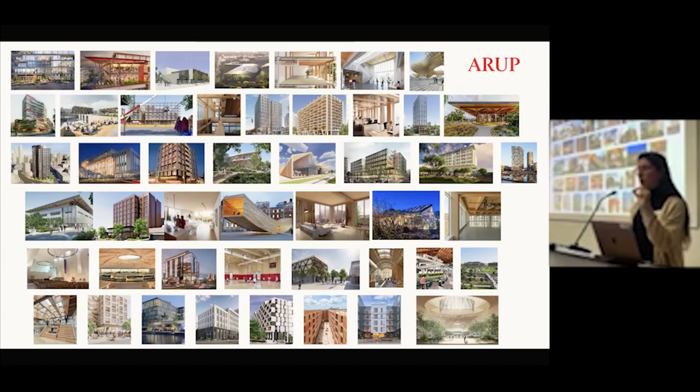One of the interesting learnings when you first get into a mass timber project like 475 West 18th Street was, for me, really understanding this interplay between a lot of different disciplines you don't normally think about in traditional construction—fire, acoustic, structural, sustainability—there's this really strong connection. It's important to understand that so you can push the boundaries and build taller, like we'll be talking about today.

We'll hear a lot more about this, but a lot of the work that came out of these early projects included fire testing, acoustic and vibration testing that needed to be done for us to really set an understanding of how mass timber would work as we built larger with newer materials.

Here at Arup, we also took some of this information and translated it into our sound lab, which some of you may have visited before, or onto the motion platform, to experience what it sounds and feels like to be in some of these different spaces when building with a new material. If anyone's interested, feel free to chat with me about it later.

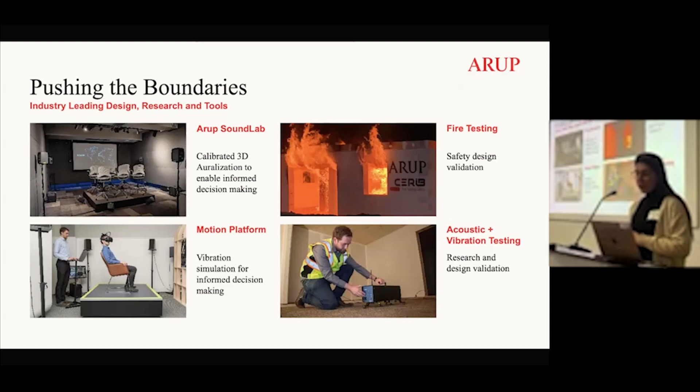These projects really allowed the next level. The permitting work for both Framework and 475 West 18th really informed the performance-based design approach for Ascent, which was ultimately built. A lot of the thinking around building taller led to more hybrid construction, which we'll hear more about, and some innovation in high seismic zones, which we'll also hear more about.

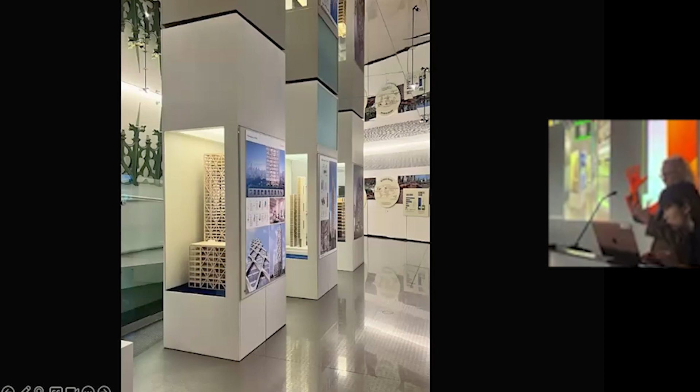The view back, looking at some of the more theoretical towers, back to a wall that sets up the context for the exhibitions, but also the important overarching narrative that's changed in these past years, looking at the decade from the winners of the competition in 2014, and the place where the architectural and engineering community is today, principally concerned with the issue of climate crisis and embodied energy.

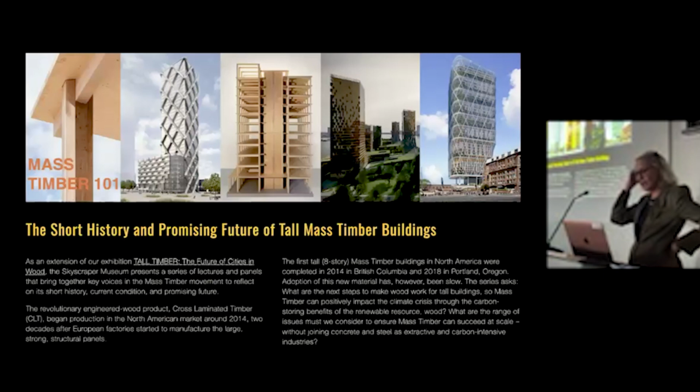One of the virtues of mass timber is its carbon cost is extremely low, unlike steel and concrete. It's a way the building community can address their complicity in the overall climate crisis and carbon emissions. Everybody here is familiar with this argument, but I want to use these images to underscore the idea of embodied carbon as the principal concern of the mass timber solution we're going to explore in the whole series.

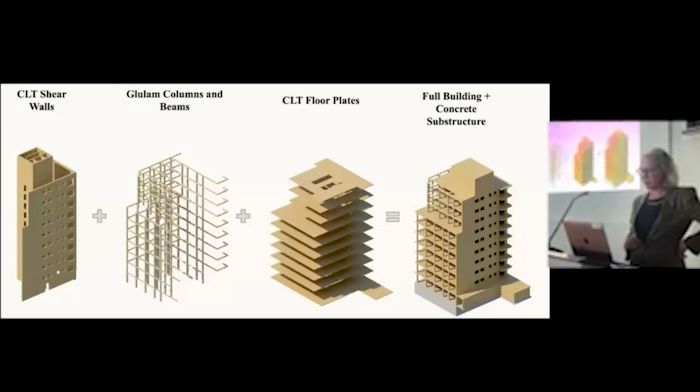I won't tell you about this competition because our speakers will, but it marks a very important aspect of the taking root of tall timber, mass timber, in the United States, and that is the role of government and incentivizing. How does mass timber consolidate as an industry, which it hasn't done? How does it grow? How do we bring in developers as well as engineers and architects concerned with these issues? Those are the larger ideas we want to explore over the course of the series.

Thomas Robinson is the founder and principal of Lever Architecture. Prior to establishing the firm, he led cultural and institutional projects for Allied Works and for Herzog and de Meuron. He received his Master's of Architecture from the GSD at Harvard and his BA from UC Berkeley. Many of you know our New York principal from SHOP, one of the founding principals of the Lower Manhattan-based internationally active practice. Chris's concentration is on revolutionary models of building that embrace next-generation environmental and material systems, such as bio-based materials, as well as process-driven innovation utilizing offsite manufacturing to achieve more efficient and environmentally responsive building delivery.

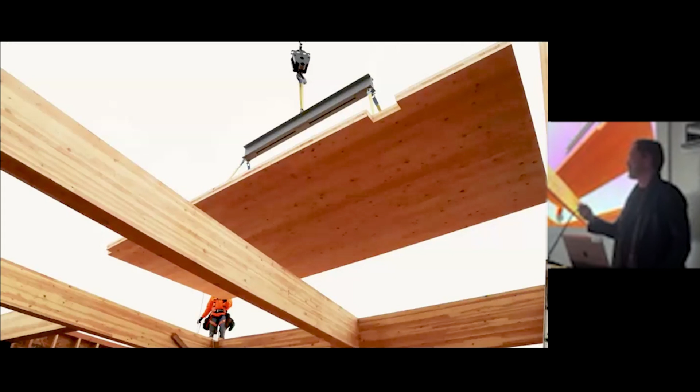Oregon happens to be over 60% forest, and it's also the best place in the world to grow Doug fir in its native habitat. So we have, in a way, this natural advantage of this amazing climate and material for trees. And this has led to this evolution and innovation in timber that's been going on for quite a while. This is a cross-laminated timber panel that many of you have heard of.

But I think this goes deeper. Our work as a firm is really not just about cross-laminated timber, but about thinking about where materials come from and how they connect to experiences. So this is a winery that we just recently finished using regionally sourced timber, and investigating working with new materials like mass plywood.

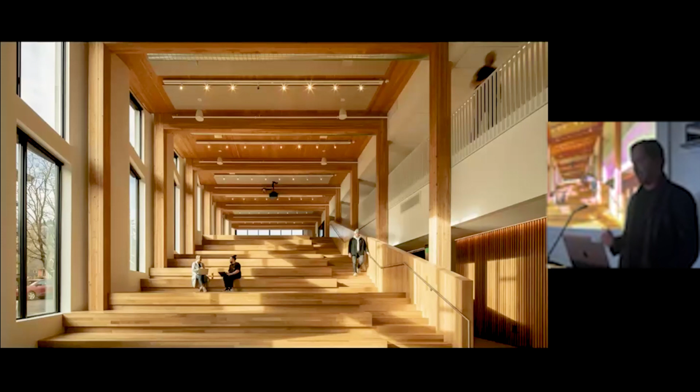This is a pavilion that was done at the time of the exhibit. And this is a project that was finished last month, working with Timber Lab on some of the materials and technologies we developed in 2016. This is an office for a digital ad agency. When we talked to Timber Lab, they said this was the most efficient timber building they've ever built. We built this in 11 months. So that's the kind of thing that dovetails back into our office.

This is Albina Yard, completed in 2016. It was really the first building in the United States, I guess in the world, using domestically sourced CLT fir in an office building. At that time, there was only one press that was making this, in Southern Oregon.

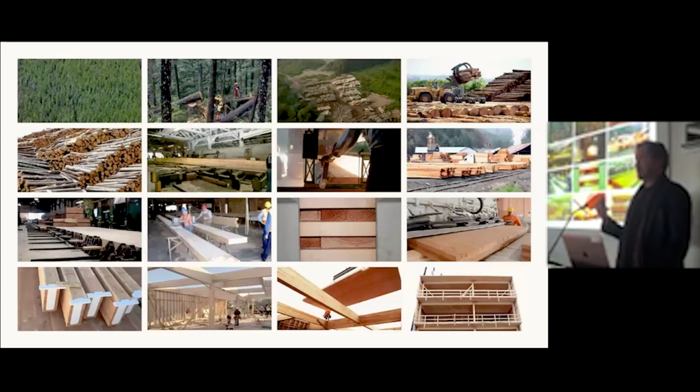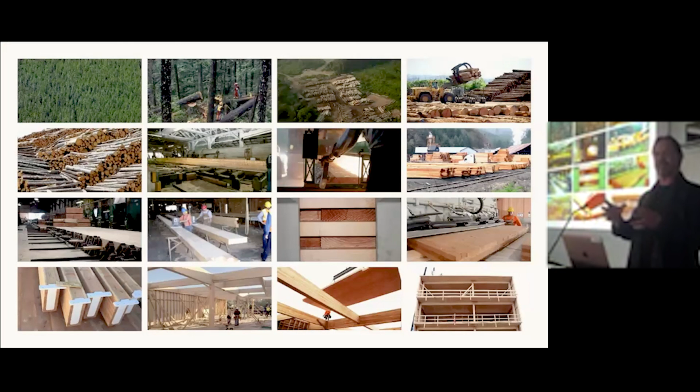And we took a more culinary approach to the design, because we realized we had to really start with the material, like a chef might start with an ingredient and then build a meal. We focused on that, and we came up with this term that was really a play on farm to table: forest to frame. That was really for this project.

You might have heard this term batted around about design and architecture. It was really about the idea that in order to do these types of innovative pieces, sometimes you have to start with the material itself, understanding what you can do with it, how you can actually get it permitted. These were all things happening as we were thinking about framework. This is my favorite image of the project: the panel you see hanging in the air was actually grown in the forest in the distance, fabricated on that press, and then shipped to Portland and put together. You can see a video of this work if you go to the Skyscraper Museum.

So framework, 2015, September 18th, that's actually Chris, you can see right in front of us. The developer, there's Jeff, and there's Anyeley Hallová, who's standing next to Jeff, who was the lead developer I still work with today. Of course, they have to have the award ceremony in New York because it's New York and it's on the High Line. Not a tree in sight.

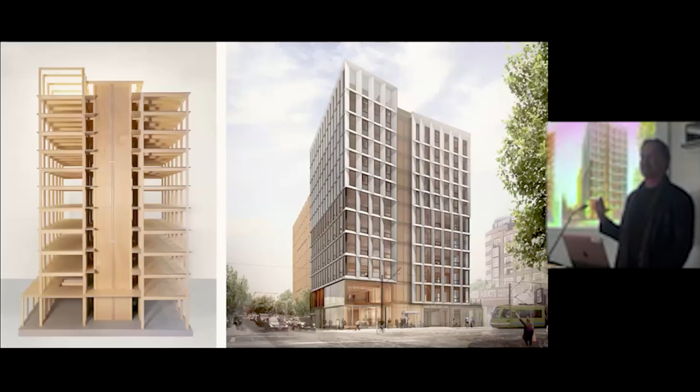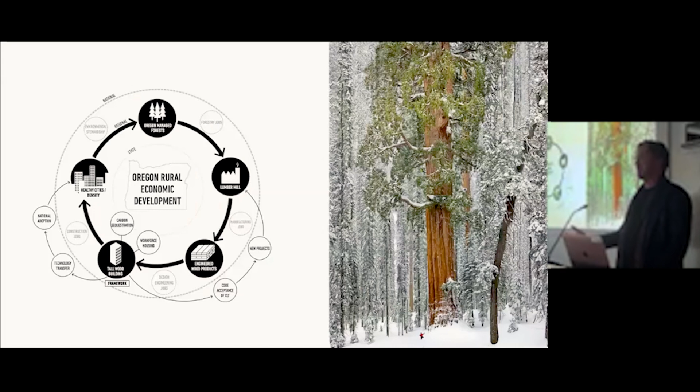But for us, it was just an incredible opportunity to participate in this conversation about the future of building. I think what's exciting for us is to be part of that conversation, and framework for us was that opportunity. What was framework? It was really, and Chris will talk about this too, we were trying to demonstrate with funding from the USDA, $1.5 million of funding, that you could build a high-rise timber building. We're really fortunate in that we basically went through 100% CDs and testing on this project. So pretty much we did everything but build the building. That testing has become publicly available, and it's become used by other people.

And that's been really, I think, an important part of this ongoing conversation in architecture.

Another really important thing for us, related to sourcing and issues around equity, is this idea of a different way of thinking about building. We created this diagram late one night before the competition was due, and what's interesting is how much of what you see in this diagram has actually come to pass in the last 9 years. We don't take credit for that, but it's exciting to see that evolution in such a short period of time.

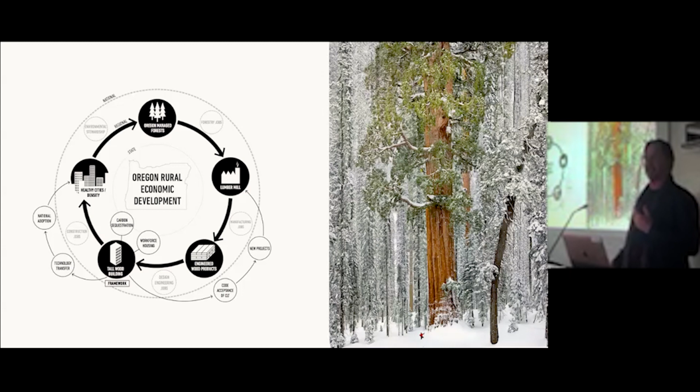From an architecture point of view, there's this idea of what these buildings should be as buildings. This super tall Doug Fir, you can see the person down here to give you a sense of scale. We were trying to do this tall wood building, inspired by these living tall wood structures that are 400, 600 years old, 260 feet tall.

The idea of these resilient timber structures led to this concept of asking what we could do on the West Coast that's different from wood, different from steel, different from concrete. So we developed what we call a post-tension CLT rocking wall structure.

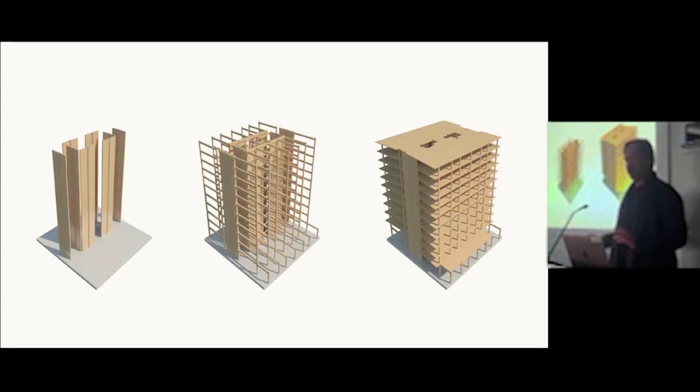These are the rocking walls here, there's 8 of them, and they'll come back later so you'll understand what I'm talking about. Basically, think of it like a building where the force hits it and it's in tension, so it can actually spring back to center. That's the idea of a building you could reoccupy immediately after an earthquake.

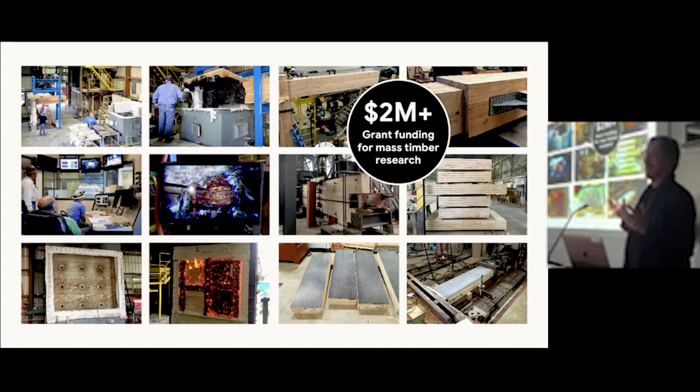We were really fortunate. We did over 40 full-scale tests. I signed all the contracts with all the different labs throughout the country — we were in Pennsylvania, San Antonio, Portland, Oregon State. This is just a sampling of some of them.

To make it even more difficult for us, we had a building that was mixed-use, with a bank and retail on the ground floor, offices, and then 60 units of affordable housing on the upper floor. That was obviously a challenge — figuring out how these 8 rocking walls translated through the building and then became these housing elements.

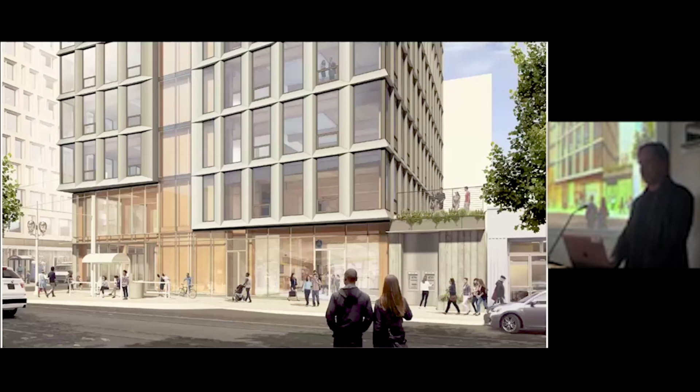Just to understand a little how that worked — going back to that image of the tree, we wanted that to be something you could see and sense. So you have these rocking walls as part of the architecture and part of the experience you'd have every day in the building. We also liked the idea that the facade had a relationship to the structure of a budding leaf on trees, which was exciting for us.

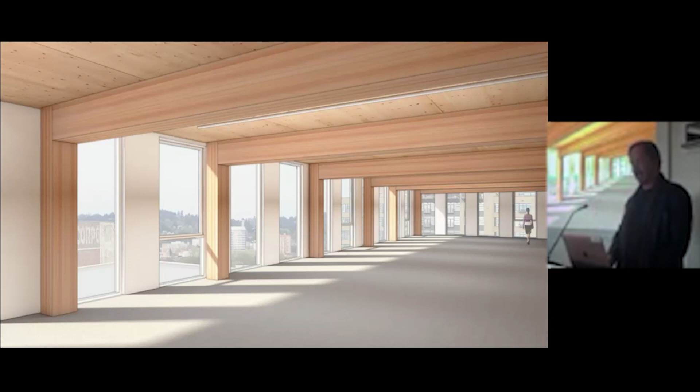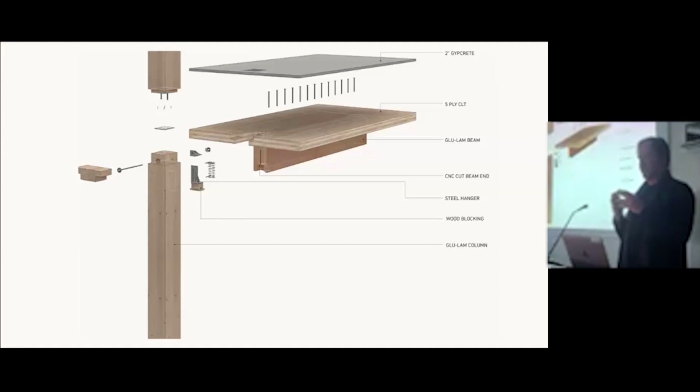Back to the more prosaic part — we had to do a really unusual test. Folks here may be familiar with high rises: in a high rise, you have to have a detail where the structure works for 3 hours without the sprinklers turning on and without the fire department showing up. So this is what we tried to do here — you can see in the structure just one detail we had to test.

We call this the framework detail. This component detail had to be tested in a furnace, fully loaded. We basically put it in this furnace and light it on fire — you can see it's on fire here — and load it to its rated capacity. Then, maybe you can see, this is it coming out of the furnace, and then they do what's called a hose test, spraying it. This is all ASTM testing — the same way they test concrete structures for high rises. It hadn't been done in a while, but I wanted to show you.

The other thing we did was test the connections for this rocking wall. We had to take timber, bind it together, do this post-tensioning, and then basically put the equivalent of 55 dump trucks on top of that — about 500 kips — to make sure that connection held. At the same time, we were also doing all the internal detailing.

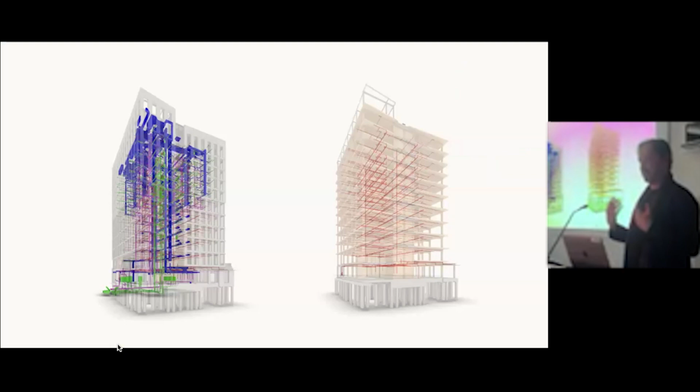This is the Navisworks model of all the structure in that building, showing all the different systems overlaid. So that was a lot of work, but we learned an incredible amount.

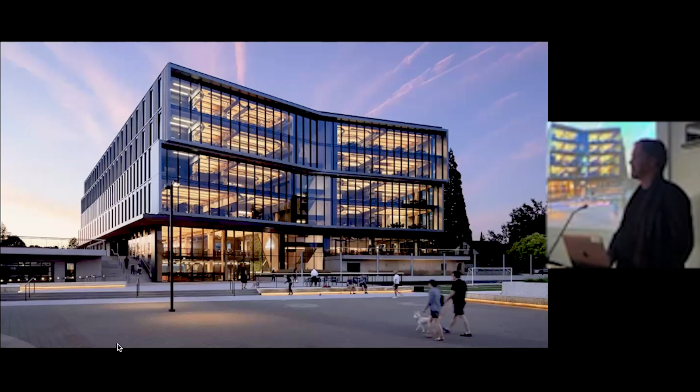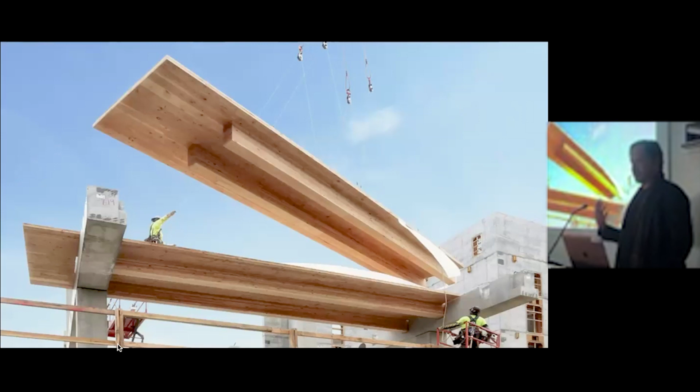Adidas said, well, as long as it's on budget, you can do it in timber, and we want it done 3 months faster than a typical project. So this whole project, 450,000 square feet, including a 600 space parking garage, was completed in 24 months during COVID. The way we were able to do that was to develop a new type of structural system where we basically took the idea of a precast parking garage and developed a custom girder and what we call a double T CLT, to create a system that's super robust and takes the grid of the parking garage through.

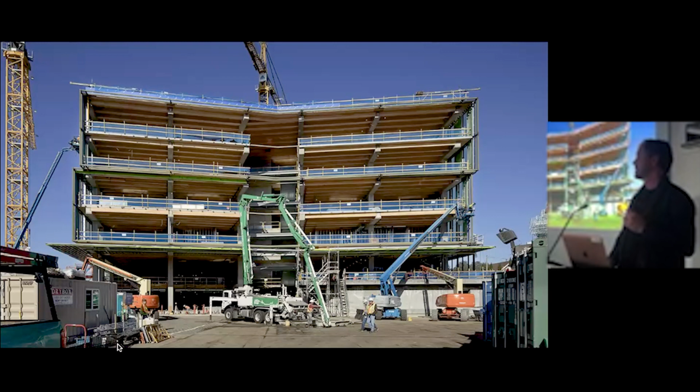We were able to build 180,000 square feet in 2 months with this system, the whole structure. Super fast, but also really authentic to Adidas brand. Everything's exposed, a very flexible system. That project has gotten a lot of different recognition, and I think you're seeing people doing whole high-rise buildings out of it. I think this is actually a really good model for a high-rise structure.

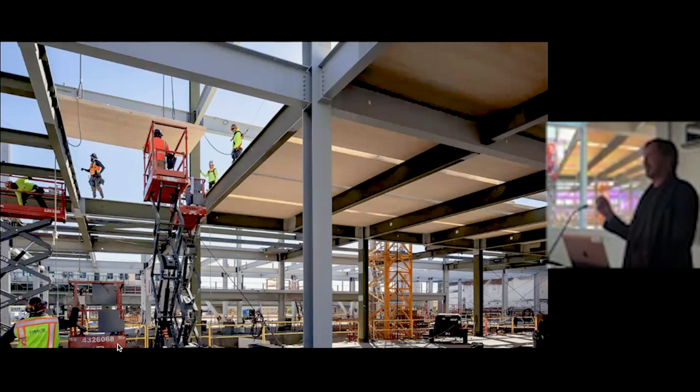Another project that we're just finishing up is a hybrid of timber and steel. It's actually a renovation, in Spring Street in Chinatown. These are some scouting photos from the last couple of weeks. It's basically a hybrid of a steel gravity structure brace frame and then a CLT deck with these cantilever decks. We worked on this thinking about how it's hard to build new things in cities, so working on what's the one thing we can do a little bit differently in LA. That was what we focused on here.

This actually has, these types of braces used in high-rise - they're Cast Connex braces, so we worked with them. I think it's not enough to just be a timber building; it has to be related to its place more than just the timber coming from there. So we wanted to do a building where we created this vertical canyon.

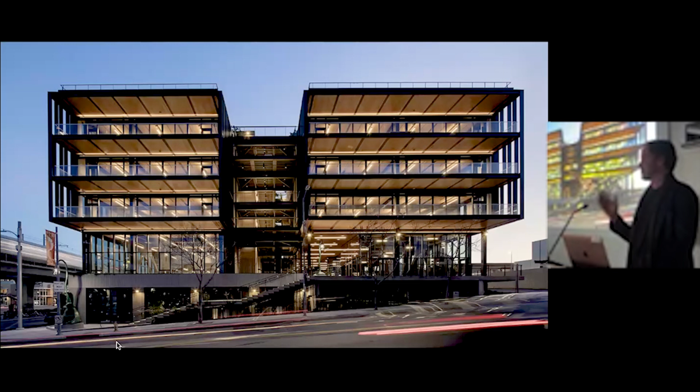We worked with James Corner Field Operations, who did the High Line, to develop this amazing landscape canyon. Everything is accessible from the outside, so the whole circulation system goes up through the building. This is finished - if you're on the metro in Chinatown, it's right there, and it's for lease. So if you know somebody, they're excited about that particular project.

So sourcing. Sourcing has always been embedded in how we think about design. It was in framework, and we were absolutely committed to using regionally sourced CLT for that project. We've kind of tried to expand that in our work.

I want to talk about one story, beyond CLT - this was actually FSC certified CLT from a forest that they own, but I don't necessarily recommend that. I think one of the things we worked on was using juniper. Juniper is a very hardy tree native to Oregon, and because of fire suppression, it's gone wild throughout Eastern Oregon. What it does is suck up groundwater out of the landscape, meaning wildlife can't survive.

We worked with a nonprofit to look at a test case of using juniper for the facade of this building. The idea is to create a market so that we can actually afford to cut down the trees to restore that landscape, and I think that's something we were able to do. This building restored about 700,000 gallons of water back into that landscape each year.

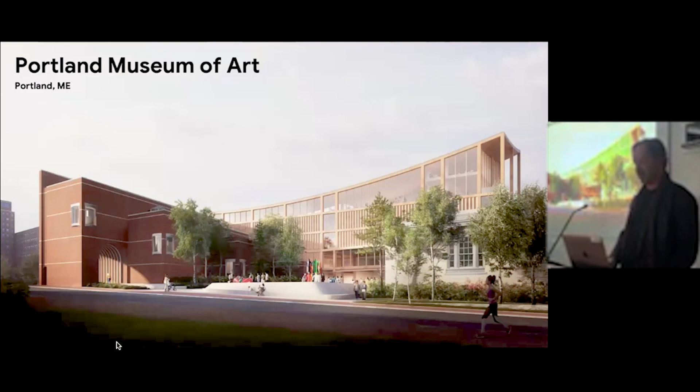This project for us really combines so many of the things I've been talking about, this idea of a catalyst project that can unlock using Northeast fiber. And this is happening right now. We're tracking the forest. A couple other projects, a year ago, people were like, that's impossible. It's happening, and I'm seeing it happening, where people are interested in doing this work.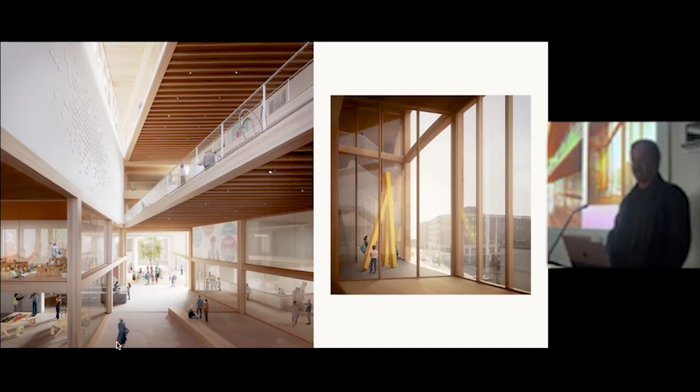So we're sourcing Maine fiber, which is spruce, and I think that kind of opportunity is real. The other thing that's been really exciting about this project personally is its interest in connecting to Native American culture, in terms of the shape of the building, in terms of welcoming communities into the museum that haven't necessarily always felt welcome. I think the material of timber is something that's very welcoming to people who maybe aren't as comfortable in other types of spaces, and that's also been a key piece of that project.

I'd love to talk more about it, but I want to actually get to the discussion and then more research.

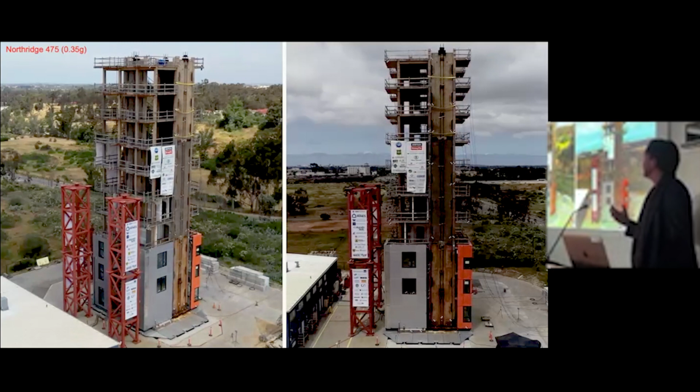Since the time of Framework, we've been working seven-plus years with all these academic institutions to build a 10-story version of Framework. There's no sound, but it makes a big clanking noise if there was sound. This is basically a full-scale test of Framework at 10 stories tall on the largest outdoor shake table in the world at UC San Diego.

So it's right next to Miramar - this is Top Gun in the background, if you know. What it is, this is the Northridge quake, a huge earthquake hitting this building, and basically we walked right up to it right afterwards, completely safe.

This was done with folks from Colorado School of Mines, Washington, and we were the architects working with them over that time period to see what we could fit on that shake table. I think this is the next generation of what's possible - this idea of not only a carbon positive way of building, but a more resilient way of building, at least on the West Coast.

We've done a whole other performance-based design project for a technology client. They wanted to push the envelope of what's possible to give themselves incredible flexibility, because one of the issues with timber is that it spans - timber doesn't span as efficiently as steel.

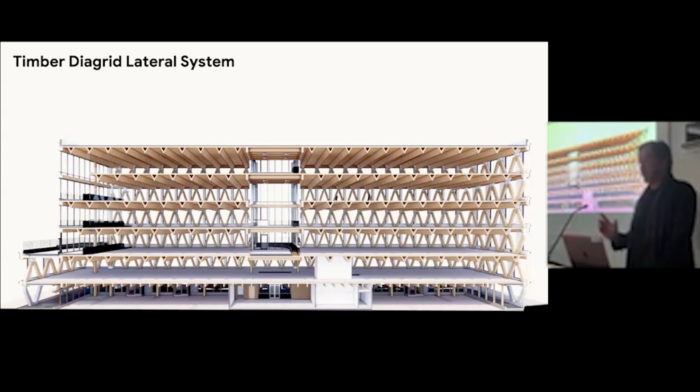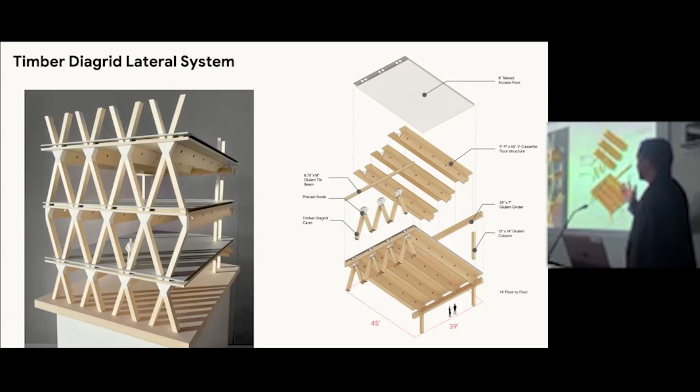So what we did on this project is we took some of the ideas from Adidas and created this 45-foot long cassette that's also a duct, then tied that to a seismic timber diagrid system with precast nodes, and basically designed, engineered, and tested the whole system.

Basically, this is the typical element of it, and this is sort of what it ends up looking like. You can actually have these pieces be supplies or returns. It actually works acoustically, which was shocking to us, and it works from a daylighting point of view because it refracts the daylight in a really pleasant way. We were really excited to see that kind of opportunity materialize.

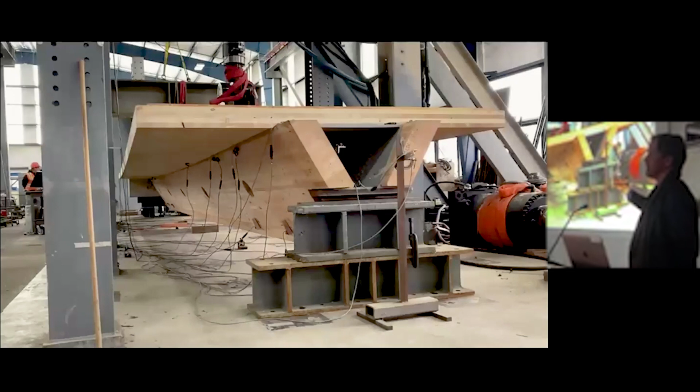We built six of these full scale in Portland, brought them to the same kind of press we'd used on Framework, and then basically destroyed them, because that's what we had to do for the code. So that kind of work has been ongoing.

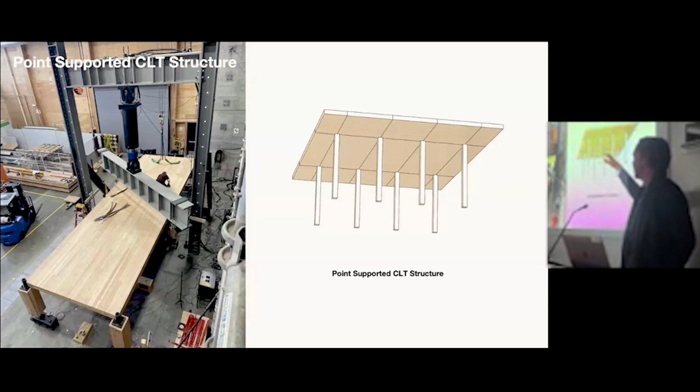This is another test we were recently involved with. There's a group of folks in Portland on the REACTS consortium where we get together and decide what tests need to happen to advance the technology in mass timber. This is the point-supported CLT test that happened about six months ago in Oregon. Basically, it's allowing and showing that you can do point-supported CLT, and that is related to a project, because I need to end with a high-rise project here.

This is a 276 unit point-supported tower in Portland. It's through CDs, it's in permit, and we are very hopeful that it will happen very soon.

Just to end, I can't think of a more exciting time to actually be in the architecture profession right now. I was talking to an older friend of mine who's an architect, and he tells his students that all the time. Sometimes they're like, what are you talking about? But I believe it's an incredibly amazing opportunity for people to really dig into these new technologies.

So with that, pass it off to Chris.

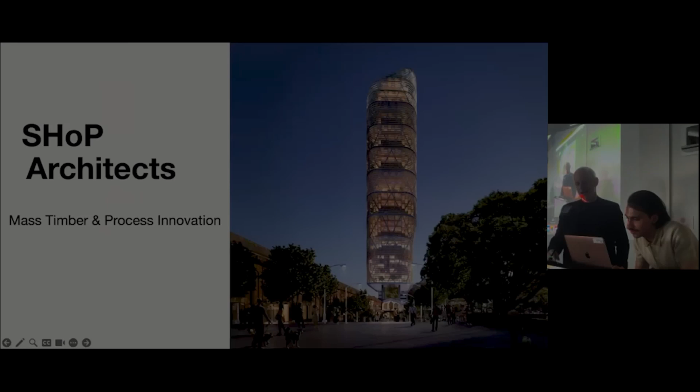Thank you, that was incredible, impressive. I couldn't help but think two things: if New Jersey was a forest, where we might be, and two, Ken Frampton's critical regionalism—how the spirit and energy of a place actually influences your design thinking and also creativity.

But in a way, I'm sort of coming at this back to the future. We've always been interested in how process really informs not only the design, but how you realize design.

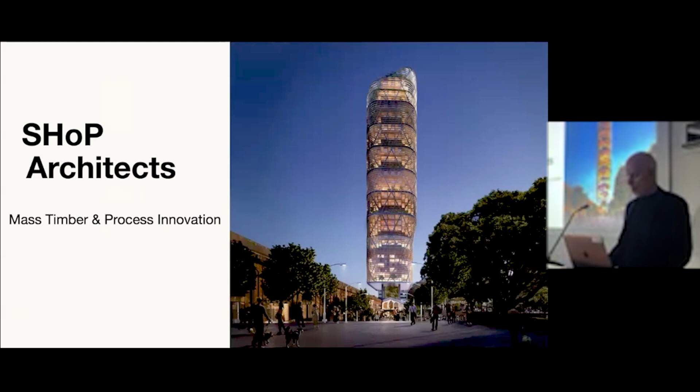It started with a lot of very small projects that happened to involve wood. Our very first commission after 7 years of higher education was Waterfront Park with a carousel house. Explain to your parents that your first commission is a carousel house after 7 years of paying education bills—it's sort of a chuckle for them.

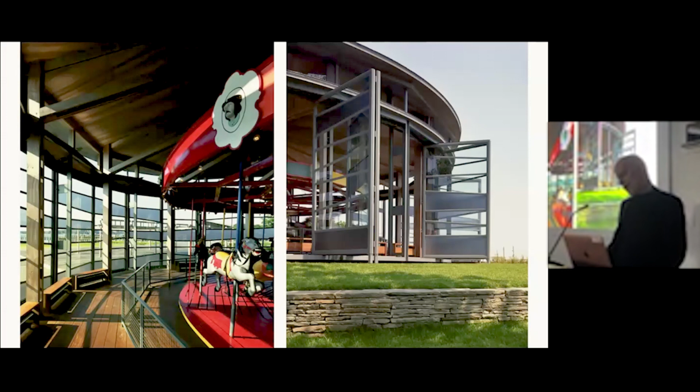But what was interesting about this whole process is how we started to think about how we communicate and manage information, especially with the people who would be building it in this case, and how a process of model-based delivery was key to that. Now, in the beginning, things weren't as sophisticated.

So we were literally building large-scale models to communicate to the contractor how to put this project together, because we had to do it with Wick's Law and we had to go with the lowest bidder.

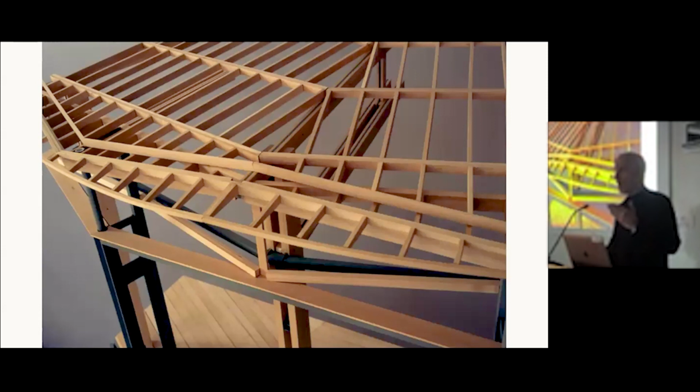But what was interesting about this process is how that use of models really gave us a chance to not only unlock how we would go about putting the building together, but how we would start to talk and have a relationship with the build team.

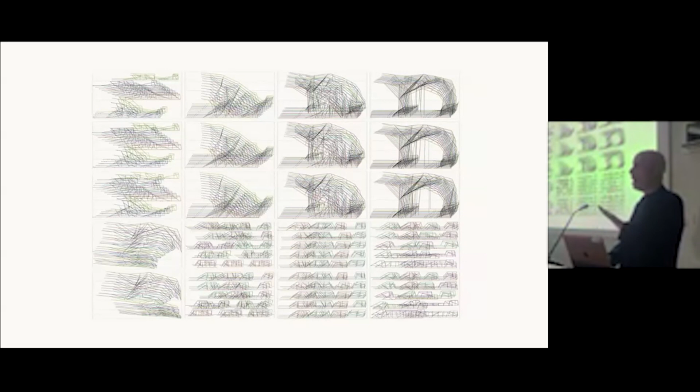And at the same time, we had won this very small commission competition for PS1, Dunescape, where we modeled the whole project in the computer and literally printed the drawings, the CD drawings, at full scale, and built the project literally on the drawings. So moving away from the idea of drawings as representations to the idea of drawings as the instructions for how you would go about building this project.

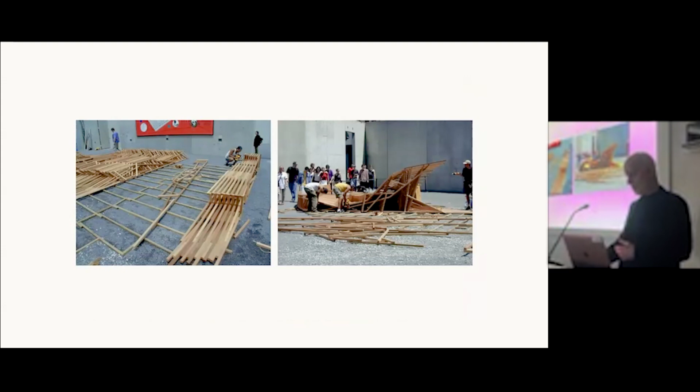What was very exciting to us, we didn't realize it at the time, is how that approach could be applied at scale. What was also beautiful about this project is the information used to actually build the full-scale Dunescape was the same exact information to build the model that is now in the Museum of Modern Art. So the idea is, how do you begin to model your whole office around this idea of a model-based delivery process?

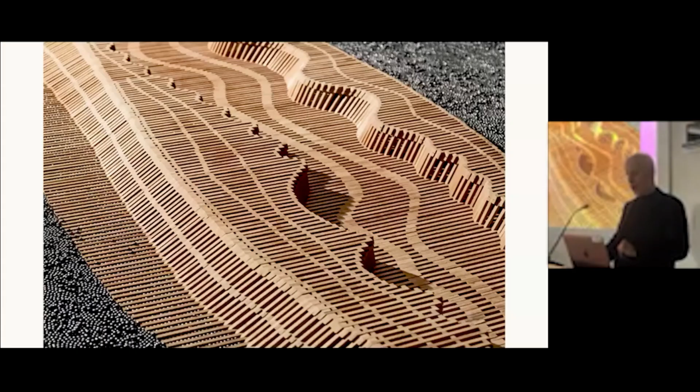So then from there, we went to our next project, and we were able to apply these things to a commission we did just outside of Seoul, South Korea, near Paju Book City exhibition hall, using some of the same approaches that we developed for PS1.

But again, what's really beautiful—and you saw this with Thomas's work—is the nature, the materiality, and how it really does have an impact on our experiences in these kinds of spaces, especially nowadays as we deal with some huge issues with mental health.

But as we move from those two very small research-based projects to the idea of imagining if you design the whole project in the computer, at this time doing this in Rhino, and this is before Grasshopper, so if you had to change things, you had to go in there and manually do it.

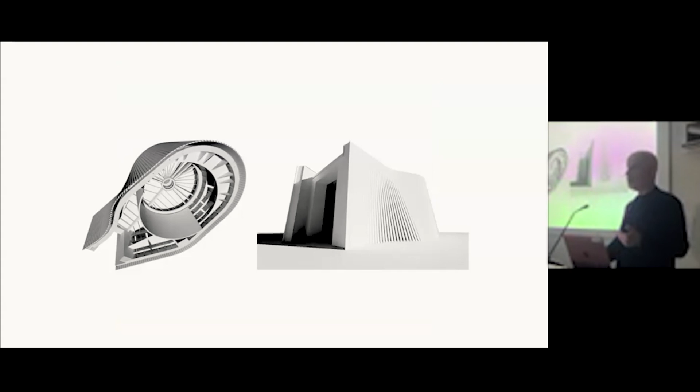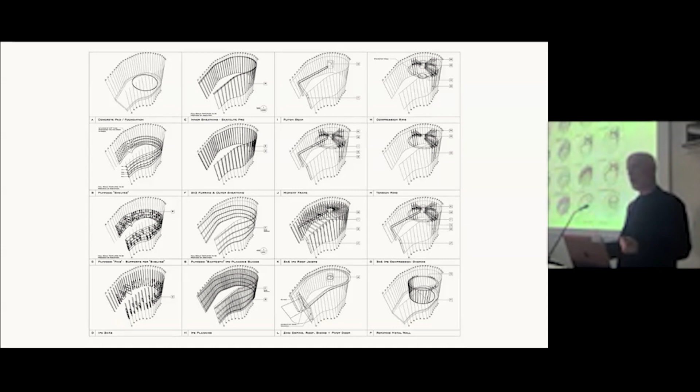But what it did is it allowed us to create a drawing set that had no plans or sections. It was literally an instruction for how you would put this together. And all the elements were modeled and then sent directly to the fabricator using SolidWorks in most cases.

So at the end of the day, all the pieces came to the job site. It was basically IKEA for buildings. And so these are the kinds of things in the first 10 years of the office.

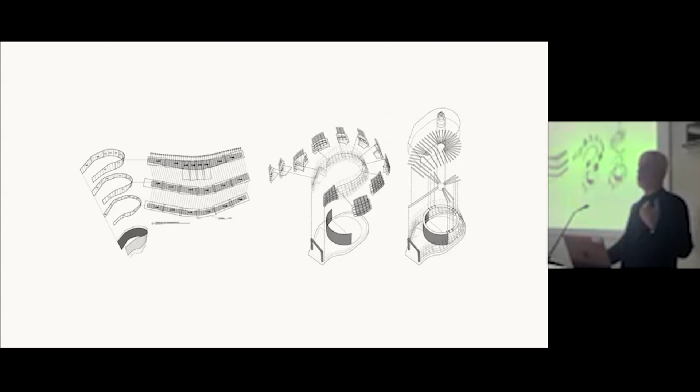We eventually supersized this and were able to apply these principles on projects like the Barclays Center. But what was exciting is when the competition for the tall timber building came out, that Thomas was talking about, a lot of the thinking about how we use these industrialized processes, off-site manufacturing, really clicked in because mass timber is such a great material for that kind of opportunity.

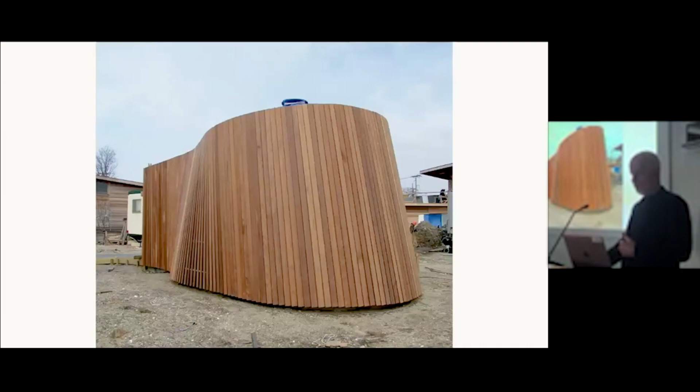Again, like with PS1, the same model that was used to build the full-scale project was the same model we were able to make for exhibition in New York. So when this came out, we didn't realize at the time how this competition would really inform this idea of how we could go to a full industrialized process with this bio-based material system.

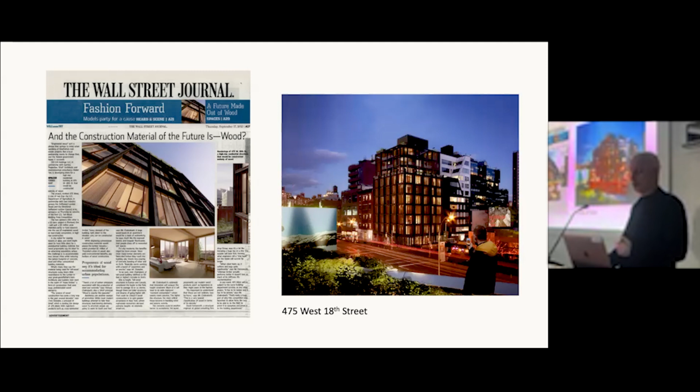The other thing that really came out of this project, and because we didn't get to see these, but we did learn a lot through the process. Jeff Spiritos was the one who actually invited us into this competition. He asked if we'd be interested, and we said hell yeah, we would love to do a mass timber project.

I grew up in Chester County, Pennsylvania, right next to Lancaster County, so I saw barn raisings with the Amish. So the whole idea of being able to use this material in an urban fabric was something that would be very exciting to us. The thing is, and we learned a lot through this process.

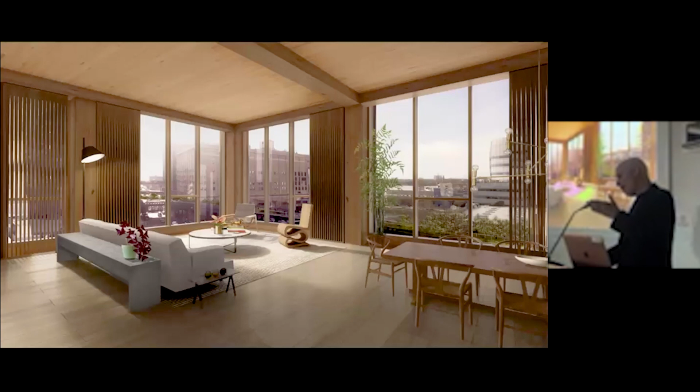We learned that the brokers in New York loved the idea that this would be a mass timber project. They were actually all fighting to get the commission to market this project. But what we had to deal with first was understanding how we would begin to develop a process with the building department.

And eventually also the higher ups at the fire department. Through this whole process of the CCD1s, Arup was very much a part of this, both on the structure and on all fire related elements, as Michelle said, she cut her teeth on this. And we learned when we were doing B2, the Dean Street project, the tallest modular building in North America, how important it was to open a direct contact with the DOB.

And we believe this is still important today, when with our other company, Assembly OSM, is getting in early and understanding how to unlock the potential of these new material systems, but at the same time be guided through the whole process with the people at the city level.

Unfortunately, the project stopped for some political reasons, and I'm not going to go into it. But as a result of that whole process, it has opened up the door for how we begin to think about how we apply these ideas of industrialization at scale and how we start to address it when it comes to regulatory requirements.

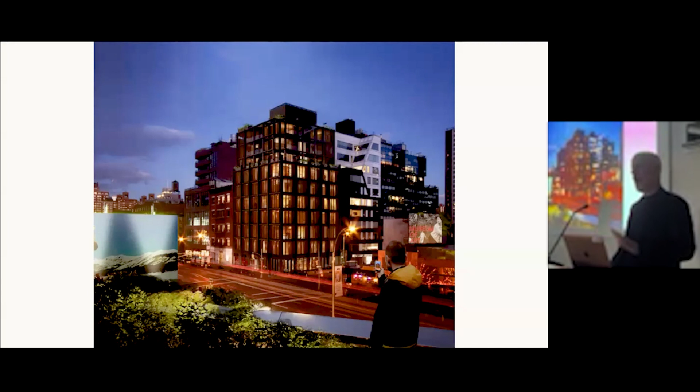So as we move from this project, unlike Thomas, our next project wasn't a mass timber project, but we did win some commissions, and this is some pictures that you've already seen Carol and Thomas shared from the High Line.

What's great is looking at this picture, Amir, who's standing right behind me, is now part of Aspect, works with Bernard, he's director of architecture. And it's nice to see Adama, who's very much with us still, based in Toronto, is very much involved with a lot of our mass timber work.

But the idea is, it wasn't like with Thomas where we immediately started getting lots of these commissions to do projects in mass timber. This is a competition we won at Syracuse for the new National Veterans Resource Center.

One of the challenges with this project was we're dealing with veterans and their families. The whole idea is Syracuse was developing this program where veterans who wanted to come back to school would also have a place on campus that was really dedicated to supporting them and their families, and also the potential of what would happen after they graduated.

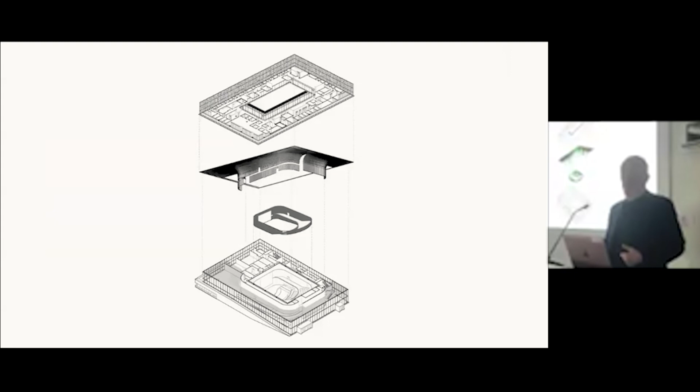One of the challenges we were told, besides dealing with some of the challenges of disabilities, is also the issue of trauma and how these bio-based materials play a big role in our mental health. So in this case, we have a 1,000-seat auditorium in this building.

We wrapped it completely in CLT. This is the interior. Scott Overall, one of the designers in shop, actually developed all the Grasshopper scripts for how we would develop this project, working with Nordic in Quebec.

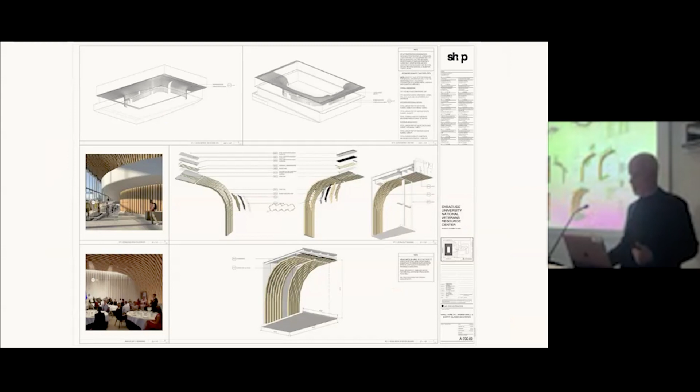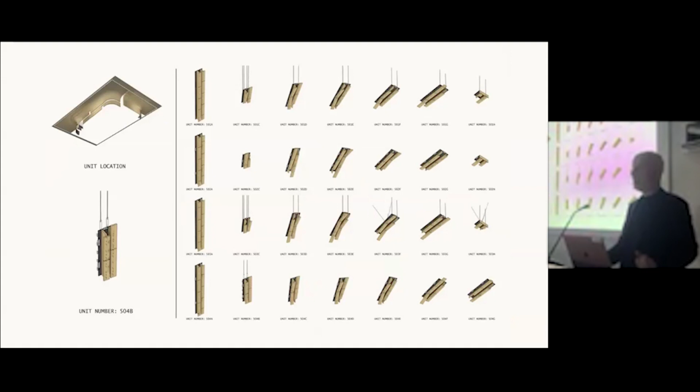But this is how shop operates. It's not just doing a design, but really getting into understanding how you would realize that design, in this case at a very intricate scale. And so how we apply that, how we share these models, how we begin to understand costing these models, meeting all the requirements, whether it's fire requirements, mechanical requirements, or lighting requirements, all those elements are very much a part of our design space.

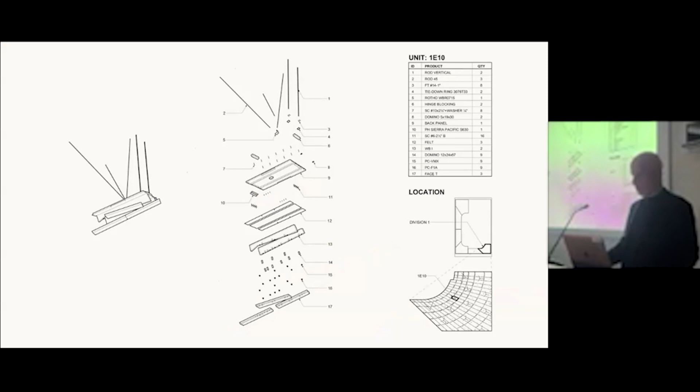If I showed you some of our non-mass timber projects, you'd be quite familiar with how this process plays out in a lot of our other work. But we see this as a very important way to begin moving the whole AEC industry toward pulling more off the job site.

When you look at mass timber, it is the perfect material for an industrialized process. These pieces show up at the site completely finished. In case you need to cut a hole, it's not too difficult, you don't have to pull out a jackhammer. The idea is that when you think about manufacturing, it's part of your design thinking, not something that comes later. It's part of how you think about the overall design.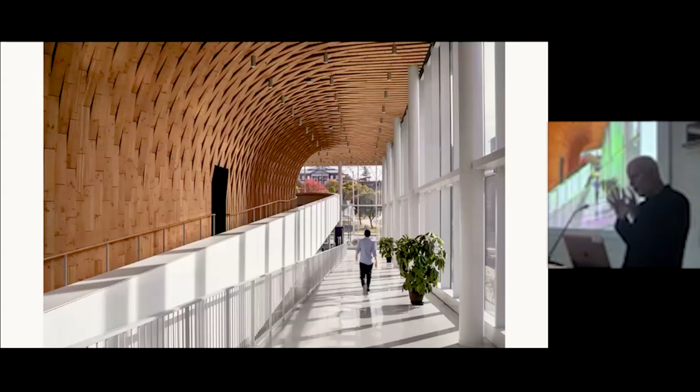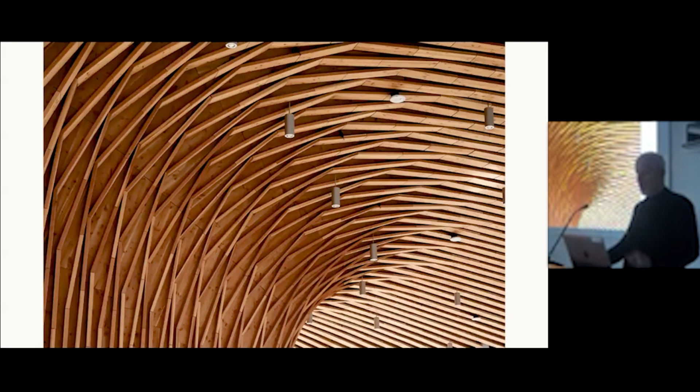These are some of the prototypes produced at Nordique. What's exciting is how using these new technologies brings out a different reading of a material that's been around for hundreds of years, and how these new approaches create new readings, new experiences. This gets back to creating a more intimate connection, a stronger empathy with these bio-based systems.

So we are just getting back into this. We have two very large projects now in construction: phase one for YouTube's expansion in San Bruno.

I remember when I first met with Susan Wojcicki, while she was still CEO of YouTube, she said to me, 'I don't want some shaped, squiggly building, basically I don't want some iconic building. I want everybody to be at their desk and be able to see a tree.' So this whole idea of being really connected to nature, and bringing that idea into the building.

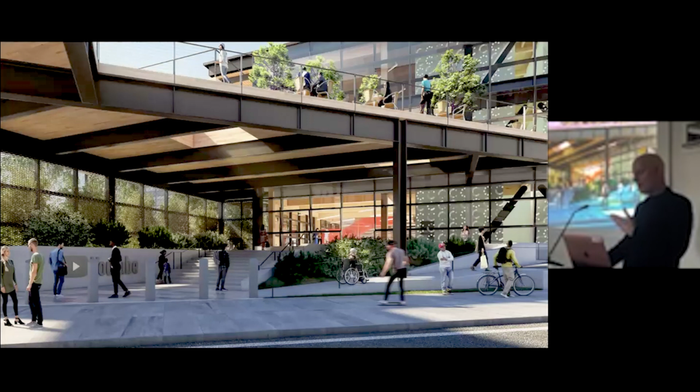Using CLT, phase one is actually a hybrid system, as Thomas was describing. Phase two would be full CLT. Again, this is not a high-rise building, it's a very low commercial project, but the idea is understanding how you immerse it into a new kind of nature within an urban fabric.

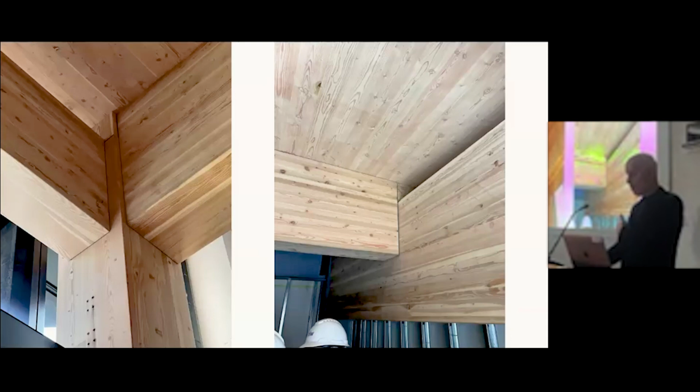I'm sort of ashamed to show these compared to what Thomas was showing, especially that last project where the MEP system is integrated directly into it. In this case, we're just running the MEP elements between the CLT and the beam, as you can see here. So this is the project.

This is another competition we won, for Atlassian's headquarters, just before COVID. This is going to be a 39-story hybrid mass timber headquarters for Atlassian in Sydney, Australia. When it's done, it should be the tallest hybrid mass timber building in the world. What was exciting about this project, again...

I think Thomas will mention this too, it's so important to have leaders in these companies really decide that this is something they want to do. It's not something that just comes from below, it really comes from the top of the company. So this was something Atlassian was very interested in doing.

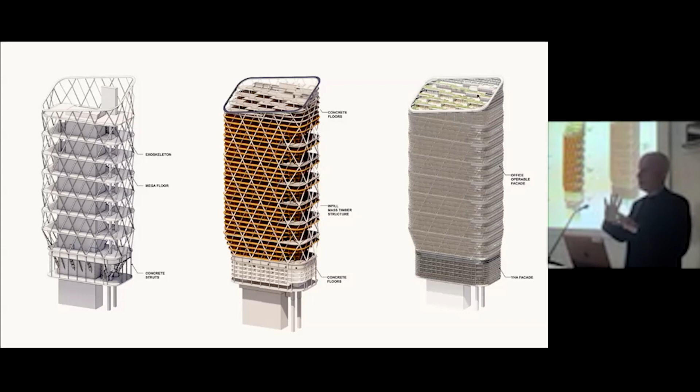At the same time, it is a hybrid structure. We have a steel exoskeleton with a concrete core, but we broke it into 7 different neighborhoods or villages, and each village is supported on a concrete deck. From that deck, you have basically this CLT neighborhood that rises up.

Before this competition, we had just finished Uber's headquarters in Mission Bay, San Francisco. One of the key concepts for this project was creating this breathing facade that, on a building monitoring system, would open up and naturally ventilate the interior of the vertical commons of the project.

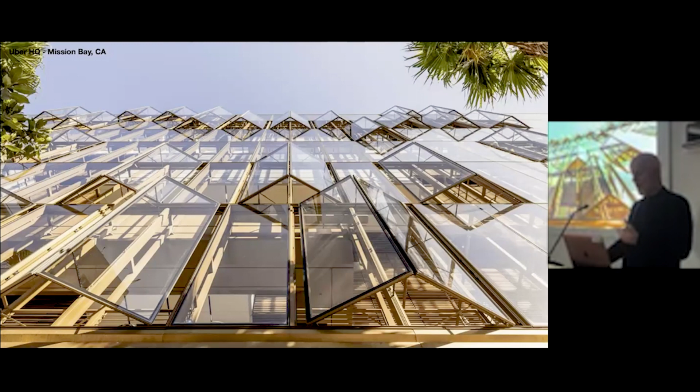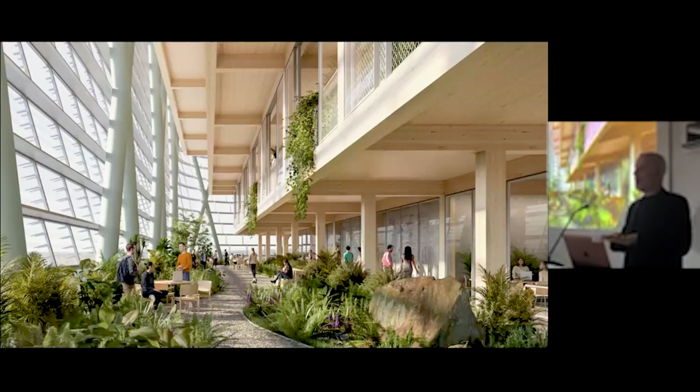So we applied the same concept to the Atlassian headquarters. It's more like a jalousie system, but it literally naturally ventilates each neighborhood. At each neighborhood, we stepped the CLT back so every neighborhood had its own little park. It's a shared commons, but behind that you had all the office space, which could slide open and take advantage of that natural ventilation.

So I think this is a material system we're very interested in, but we see it as a way of leading how our whole industry can begin to think about different ways of project delivery.

One of the things Thomas mentioned is you're talking about a much smaller population of erectors, people on the job site putting these buildings together. Lendlease was talking about when they were doing a lot of these Red Roof Inns, they had 11 people in the whole erection crew, and maybe 2 or 3 of them were skilled, everybody else was learning.

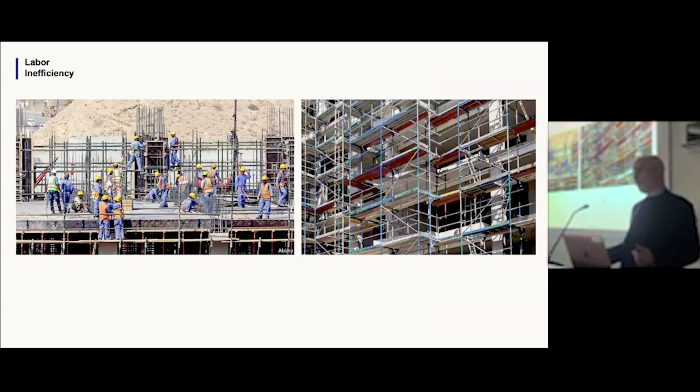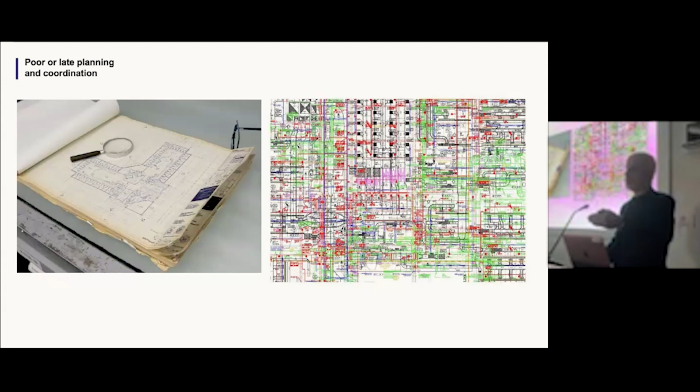So the idea is how we can create more efficiency, create a quieter job site, and also because it's a manufactured product, things show up on site with a certain level of precision, a certain level of craft. You don't necessarily rely on representational devices to manage this process. So the idea of digital fabrication, DFMA processes, become really key.

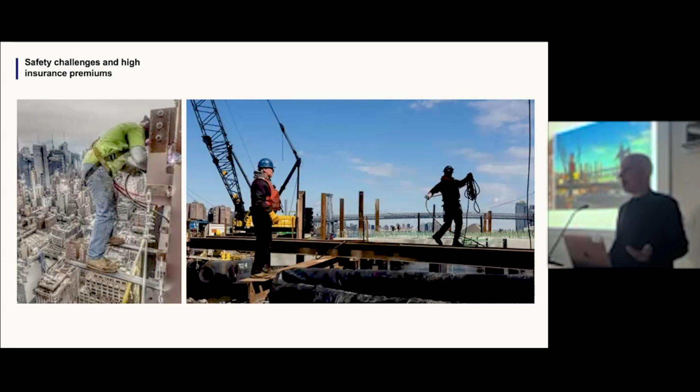And safety, as we know with a lot of the work that goes on in these cities, is critical. But coming back to this idea, if there's a problem on the job site and you're working in a material like CLT, you can go in there and fix it relatively quickly compared to some of the other high carbon solutions we're all used to seeing.

The other thing is seeing the impact on waste. But I think this is the most important part, the part we all forget about: when you build a building in a city, it usually takes 3 years on average from start to finish, and everybody who lives near a job site has to put up with it, whether it's the noise, the pollution, the traffic, or the safety issues. The point that Thomas brought up, that cutting construction time by a quarter has a huge impact, not only on the community but also on the developer's bottom line.

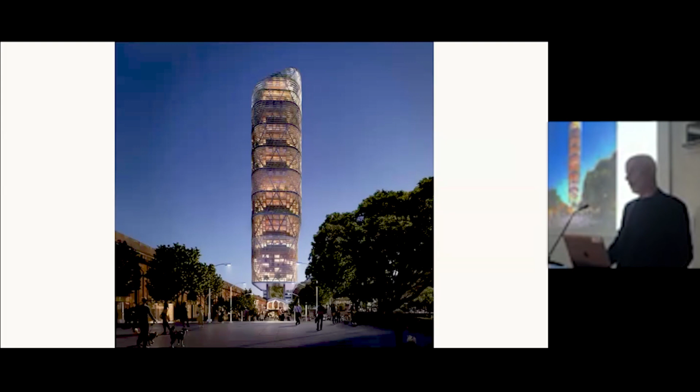So this should be part of the conversation when we talk about how we bring these material systems into our cities—how we modernize and understand this relationship, not only in how we deliver projects, but how we create a more resilient supply chain and an environment that is not only a beautiful project when done, but through the whole delivery process has a positive impact on our communities. So on that, thank you.

It's incredible to be here with these absolute industry leaders in mass timber, from Portland, from New York, and throughout the world. Thomas's reach has no bounds, really, and it's incredible.

If you look at it from a worldwide scale, Europe's been at this for 20 years longer than we have. There's both policy and commitment to sustainability that's really setting the way for the US, North America, and the world to move forward. The opportunities that Chris and Thomas talked about, because of the inherent characteristics of timber products in timber buildings, really make it a structural system that's only going to grow. It's the first in over 100 years proven to be deliverable for tall buildings, and we're all in this evolution that's taking us to the way buildings are going to be built in the future.